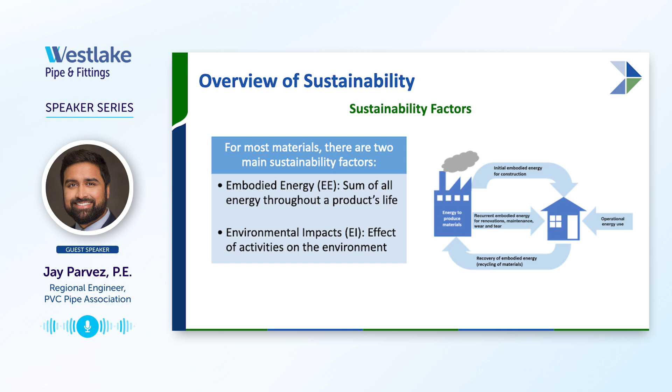So these are actual numbers. So I think, if you guys agree or disagree, if you know these two values for a pipe product, then you know everything about its sustainability. You know how much energy and how it's impacting the environment, okay? And with these numerical values, you can then compare with other similar products. Then you can say, okay, this one is more sustainable than the other. Having this information will help you know about the sustainability of a product. Now, those kind of qualitative answers aren't bad, they're just not as helpful as something numeric. But keep in mind, these are just some of the things that we've listed on here.

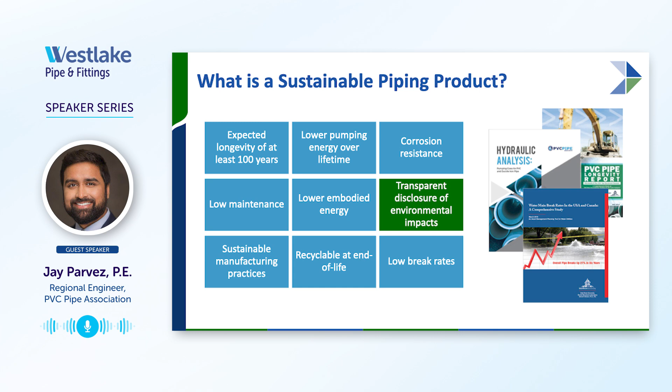I think the most important things that you'd want to see in a product for sustainability, I think the best things are corrosion resistant and 100-year life. Basically, I'll just say is that pipe, when it's in the ground, you don't want it to degrade and you want it to last, okay? That's how you can meet those definitions of sustainability. But keep those in mind, and then there are some other properties that we list on there. But now I'm gonna get into how we find those two values that I said, all right?

By the way, this presentation, it has a lot of bullets. I don't want you guys to bore yourselves reading through. I'm gonna summarize each slide.

Okay, so the way you find those two values, those two terms, it's called a life cycle assessment, or an LCA. A life cycle assessment, it's a study that's done on a product that looks at the entire life of the product, everything that goes in and out, any resources, any energies, and then you can determine those two numbers, okay, the embodied energy and environmental impact. So after you do an LCA, there's another document that's done, it's called an EPD, Environmental Product Declaration. So an EPD is just a document that gives the results of the LCA.

And there's a reason why there's a thing called an EPD. I'll talk about that in a little bit. But this is how you've determined those two values, and how is it transparent? How does a manufacturer release that data? It's through this process. You do the LCA study, and you do an EPD document, okay?

So anyone can do an LCA study, and in fact, even a manufacturer can do that on their own product. A researcher, a scientist, anyone can do an LCA on a product. Because anyone can do it anytime, anywhere, it's best if we have standards, right? So we want to follow a standard. There is a standard for doing an LCA study. It's under ISO, International Standard Organization. It's ISO 14000 series. And so there's a few different standards, but basically there's two here, the 14040 and the 14044. That's how you do the LCA.

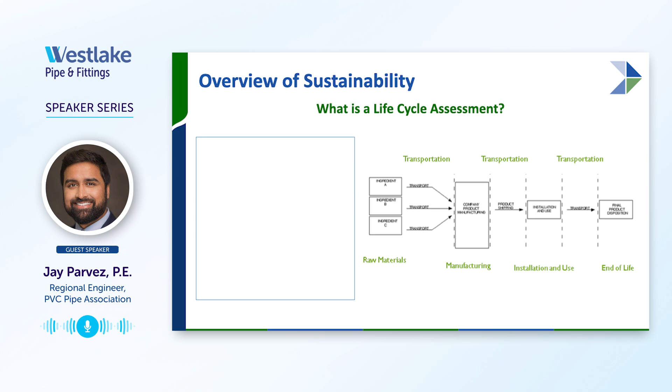All right, don't worry about reading all this. Basically, the PVC Pipe Association was the first and still the only pipe industry to do an ISO LCA and EPD. Okay, so what does that mean? First things first, we have the results transparent to you guys. So any end user can literally look in these documents and they can see those values, how much carbon output and how much energy does it take to make the product, okay? That's number one. Now, number two, it was third-party reviewed and verified.

So a company called Sustainable Solutions Corporation, they're an environmental firm, they did this LCA study. And I'm going to show later, there were 3 experts that reviewed it, and then the EPD was verified by NSF. So Sustainable Solutions wrote the EPD, NSF verified it. So that's the third party that we're talking about, okay? So again, we're the only ones, no other pipe material. I think one pipe material for storm sewer has done it, but for water and sewer, we're the only ones, okay?

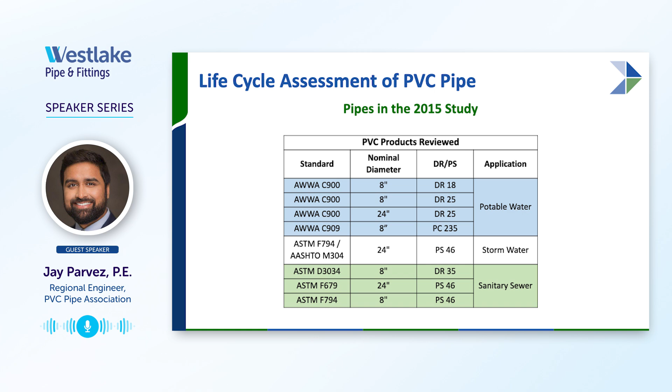All right, so the LCA study was done on these different PVC products. For C900, it's different sizes, 8-inch and 24-inch. And then C909 was also looked at. I'm going to talk about C909 in my next presentation. But then also PVC sewer pipe, solid wall sewer, and corrugated for stormwater. So these were the different products. Now, before I get into the results, for time reasons, I'm not going to show the actual values for this study. I think I'll do it for the 2023.

But what I wanted to show is, once we did it, we had the results for the PVC pipe, right? But the next question that came up was, okay, well, what does this mean? So PVC pipe has this carbon footprint. It has this much energy total. But how does that compare to other pipe materials? That's really the useful information. And in fact, that's the whole purpose of an EPD.

That whole standard is laid out to where an EPD can be done for one product, and if you do the same EPD for a similar product, you can compare. Basically, EPDs are meant to compare different products, the LCA results, okay? So now we wanted to see, all right, we have the numbers for PVC and PVCO. How does that compare to other pipe products?

Now remember, we're the only ones that's done this for ISO standards. But what Sustainable Solutions Corporation did was, they said, we'll do some research and we'll write a report that not only shows the LCA results for PVC pipe, but we'll look at other papers done on other pipe materials. And so they found some information done in other countries for these other pipe materials, because again, it hasn't been done in North America. And these are not ISO certified either, but it's just what's available. And so they wrote a report and they did a comparison.

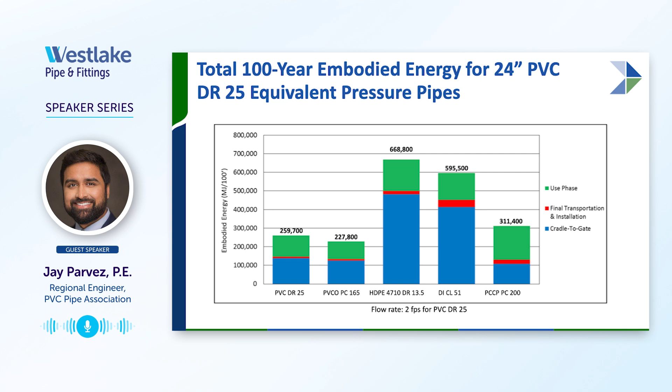Okay, so now we're zooming in into the use stage, which again assumed just pumping energy throughout the life of the pipe. So one of the main assumptions was for the metallic pipes that have cement mortar lining. The authors of that report assumed that the Hazen-Williams C factor decreases over time, or in other words, the friction increases over time. This can happen in cement.

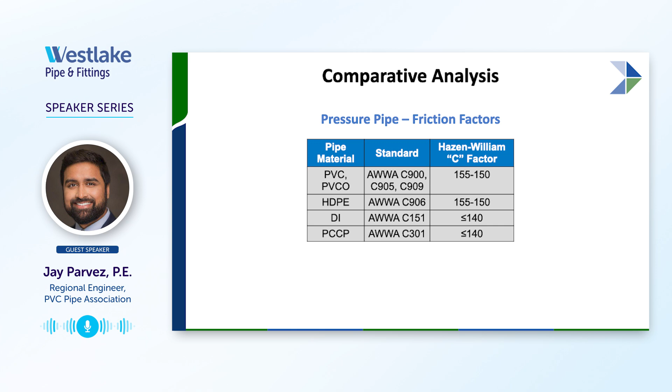There's papers done on this, and Uni-Bell, this is a document we have on our website. We have a page that shows data that shows that. So these were the assumptions that were used to determine those pumping energy values. These are the Hazen-Williams C factors. They actually assumed a slight decrease with even plastic pipes, PVC, PVCO, and HDPE. But for the cement mortar lined pipe, they assumed starting from, this is what you find in literature, C factor 140, but they assumed there was a gradual decrease over time. And they talk more in detail about how they modeled that.

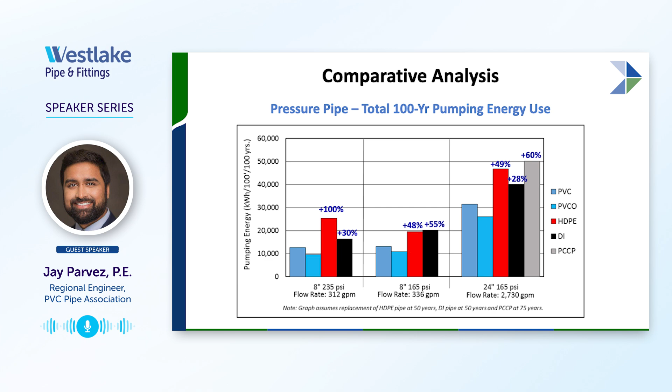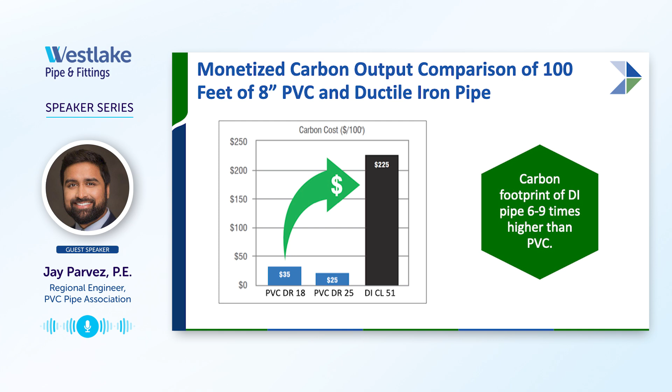Okay, this is just a graph that was in the LCA report. They looked at how much carbon, I think from cradle through installation, if you were to monetize that, if you were to put a dollar value. So this is not pumping energy, this is just the carbon output from cradle through installation. It's just another way to visualize that difference.

All right, so that was pressure pipe, C900 and pressure pipe. The same thing was done for gravity sewer pipes. I don't think I show it here. Well, anyway, this is embodied energy. So this looked at PVC versus other corrugated type polypropylene, polyethylene, and also ductile iron, clay, and concrete pipe.

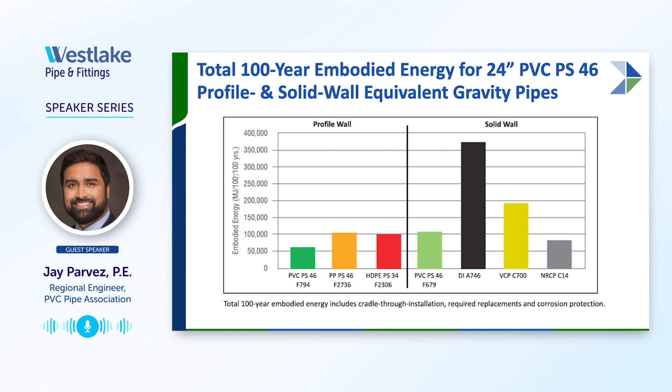Okay. The report also added flow comparisons for sewer pipe, because in sewer pipe you don't have pumping energy, right? So there was no use stage, but the authors wanted to include a hydraulic flow comparison. This points out that for sewer pipe, with PVC you can get more flow on the same slope, and this is 24-inch pipe. But even if you look at this bar on the far right, a size smaller, 21-inch PVC has about the same flow rate, very comparable to these other pipes, ductile, clay, and concrete. So it was just highlighting the benefit of the flow for PVC sewer pipe.

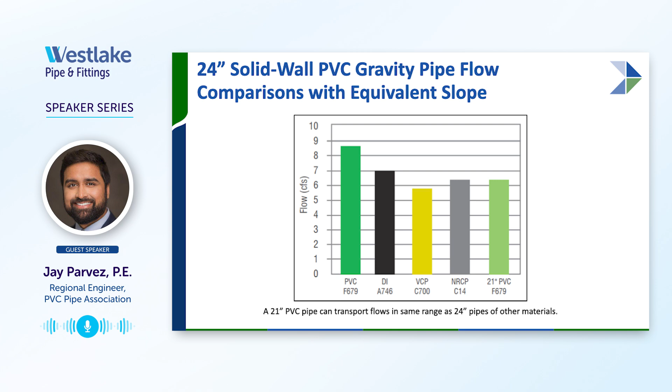All right, this was the LCA study done by Sustainable Solutions Corporation. If anyone is wondering, it's very convenient, PVC just happened to win in every category. But there's other LCA studies done that found similar results, so I just want to show that. This was done by Purdue University. They looked at environmental impacts, different impact categories, different ways a product can impact the environment, and they found PVC has the lowest environmental impact compared to ductile iron, fiberglass, and concrete. So it's not just this one LCA report. The study references some others that looked at LCA comparisons, and you find that PVC comes out to be the lowest. Basically what that establishes is it's a low energy product and a low environmental impact product.

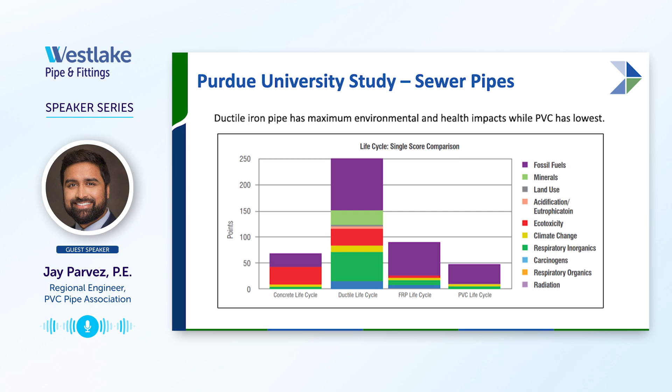Okay, so that was 2015. Now, one of the good things about this ISO standard for EPDs is that they have a time frame. They say it's a 5-year time frame. After 5 years, it's considered expired, and if you want another EPD, you have to do it again. And that's good because changes can happen in manufacturing of a product, right? It can look good one year, and a decade later it can be horrible. So that's one of the good things. It's required to renew your EPD or do it again.

So we did the first one in 2015. We were supposed to do it in 2020, but I guess COVID, so 2023 is when we redid it. And that's what you have in front of you, the one that looks like this. And so if you wanted to look at the results, let me just skip ahead real quick.

Well, I'm too far ahead. Anyways, we'll look at the results in a second.

So one of the things that's in this document is a section called health and safety disclosure. This just gives general statements about the health and safety of PVC pipe. So again, NSF did this report. I'm just highlighting some of the things, and I'll highlight one in particular. This document states there's no harmful chemicals that come from the pipe to the water. So this, again, was an evaluation done by NSF.

And there's other statements, and I'll talk about it more in detail, the PFAS and microplastics. Those are the hot topics. But anyways, there's a section that talks about that. It's just a way to verify there is no known harmful chemicals coming from the pipe into your water. So no known chemicals from this 2023 report.

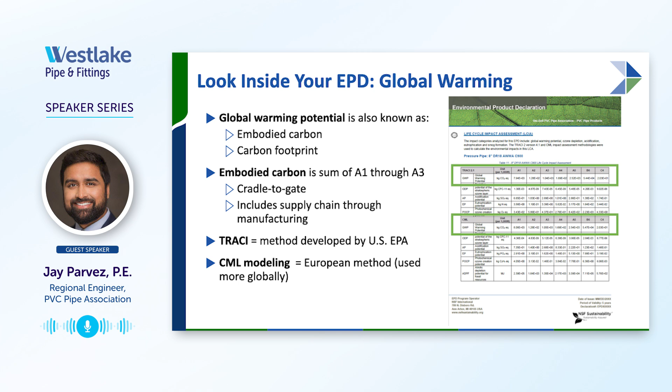I think the only thing most people care about is the global warming, the CO2, and that's this GWP, global warming potential, in units of kilograms of CO2. You just look at that, and it has the value for the different stages. I think it has the total, or if it doesn't, you may have to add up the total. That's just how you read it. If you wanted to assess those values, you just go to the table and add up those global warming values.

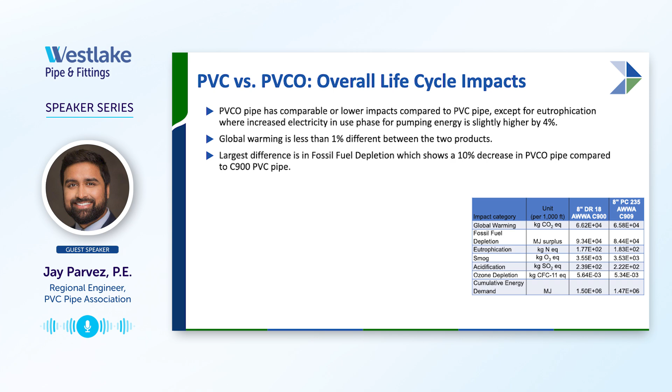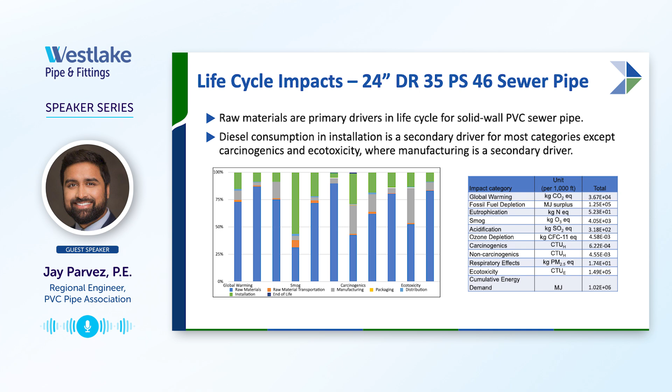So if you basically remove the pumping energy, then it becomes the raw material, more so than the manufacturing of the pipe. The gray is manufacturing the pipe, or transportation. So PVC resin takes up most of that carbon output. So this is just going into more zooming in of the stages. Which stage in particular is causing most of the carbon output?

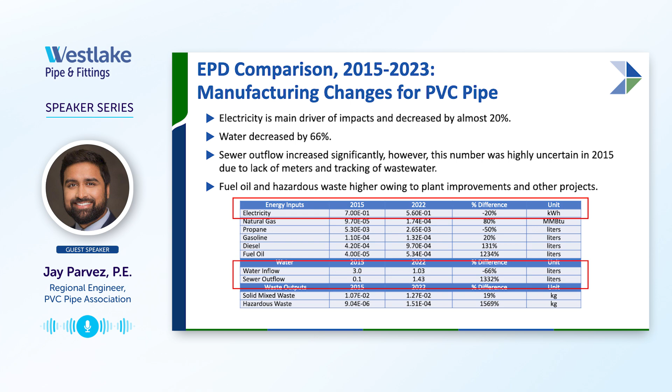Okay, so that's the LCA. Now I'm going to get into a little different topic, but I just want to recap this LCA thing. Again, the main takeaway is the PVC industry is the only industry that's done this third-party certified study of the environmental impacts, okay? And what does that mean? Well, it means we're the only ones that give you the results of that study. I'm gonna compare this to, not to pick on other pipe materials, but ductile iron. What you'll see them do is they'll say, we are certified by this green organization. They're called SMART certification.

So this organization, what they do is they give ratings, gold, silver, bronze, and they say, oh, ductile iron pipe is our gold rating. And they say, we've done the LCA, we've done all this assessment, we give ductile iron gold, and so they tout that. That's good, I don't want to harp on them, but the problem is, the results of that LCA, you're never going to find it, okay? You will not, even if you ask them, I don't think they'll give it to you.

Because they didn't do it by ISO. They didn't do it by a standard that requires transparency. And there was no third-party review. It was just that SMART certification. They just did it. There was no third party that looked at it. Okay, so that's why I'm emphasizing this. It's important to keep in mind, we did this for a reason so that we can be above and beyond. And we're open. If you guys want to look at how we're impacting the environment, it's right there. All right, so that's, I think, the main thing to keep in mind with the LCA of PVC pipe.